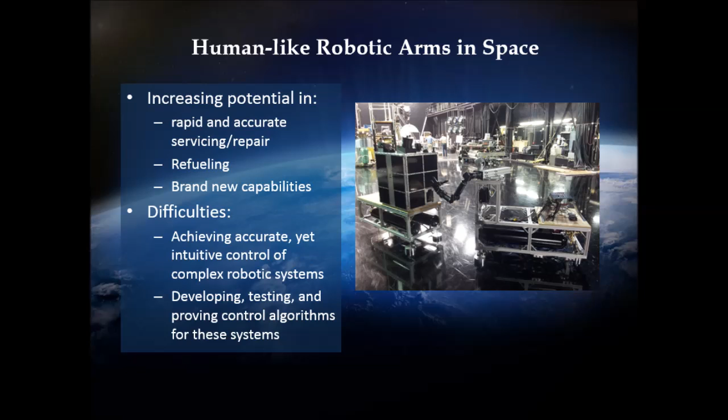Hello, my name is Christina Monakova, and last summer I interned at the Marshall Space Flight Center, and this was my project. I worked in the Flight Robotics Laboratory to develop a testing platform for future robotic satellite servicing demonstrations, addressing the need for an easy-to-use controller for complex robotic arm systems.

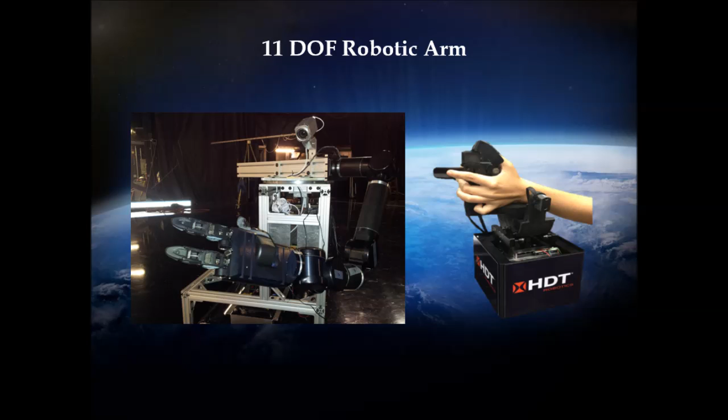I worked on designing an intuitive controller for an 11-degree-of-freedom human-like robotic arm. But to do this, I first needed a way to test out my controller and control algorithms without damaging the lab's expensive arm. Simulink provided the perfect solution.

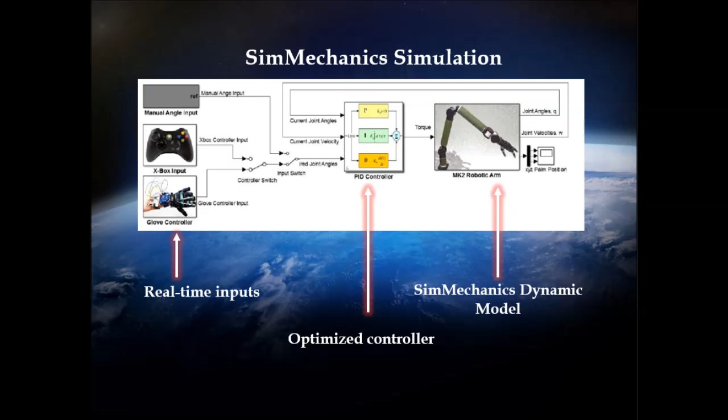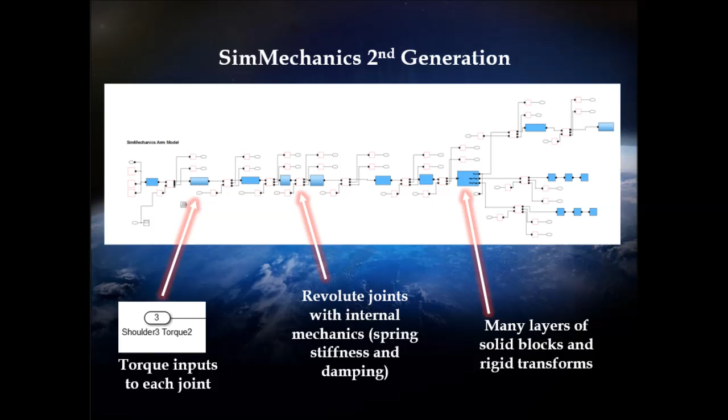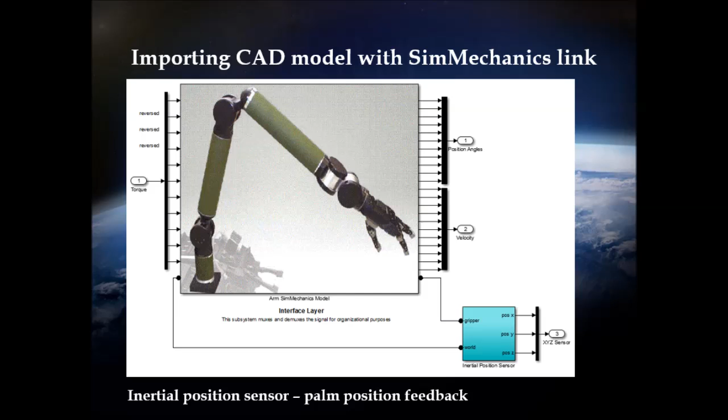I imported a CAD model of the robotic arm I was using into Simulink using SimMechanics Link, added revolute joints, rigid transforms, and constraints until the SimMechanics model matched the lab's physical arm. I was able to directly control the torque input to each arm joint and control this torque signal using a PID controller, which I then optimized.

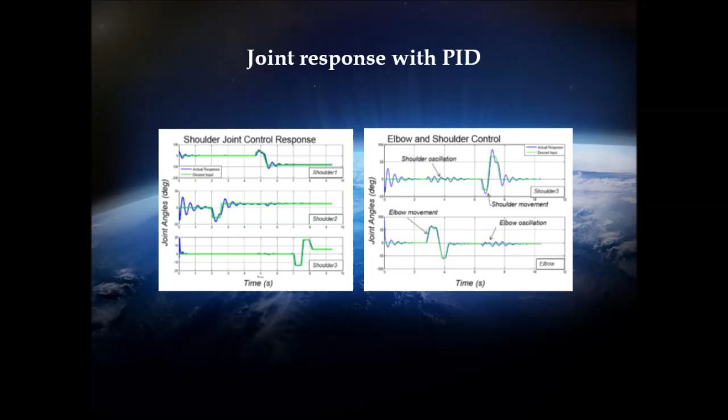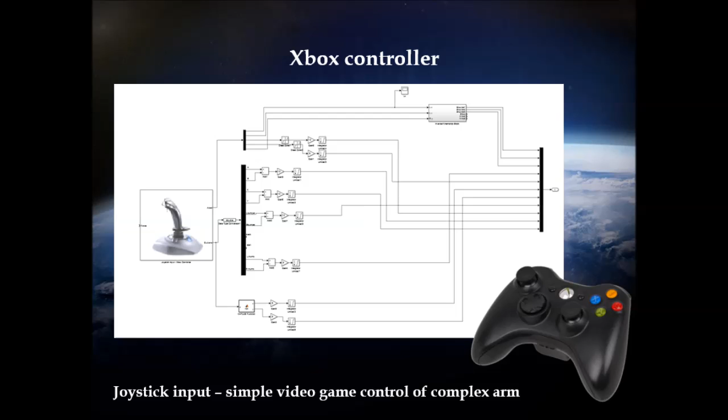Once this was finished, I was able to manually control the arm simulation via angle inputs to demonstrate functionality. Then, to get a little fancier, I added an Xbox input via Simulink's joystick block and controlled the robotic arm in real time like a video game. Once this basic functionality was demonstrated, I jumped into the meat of my project.

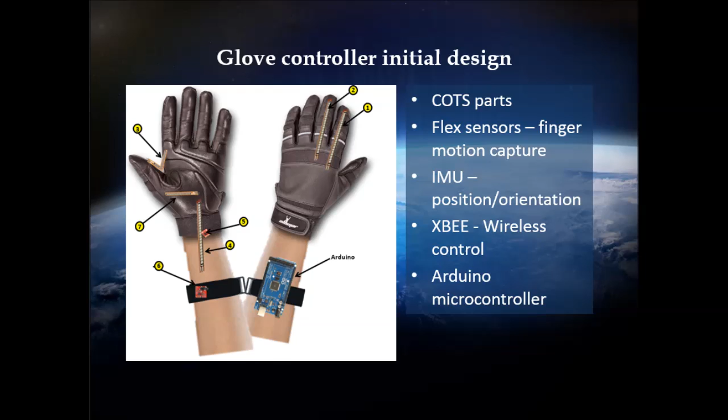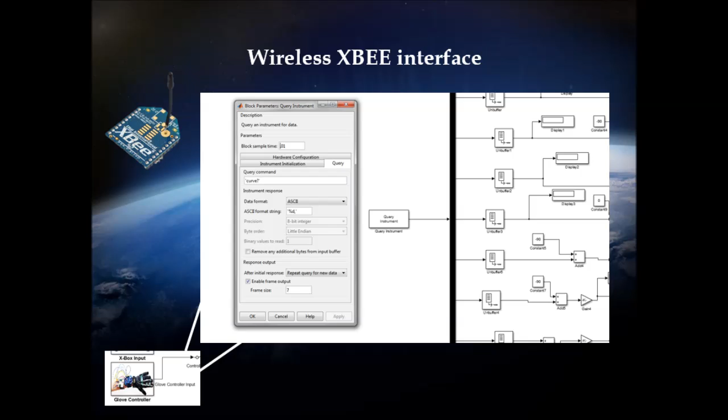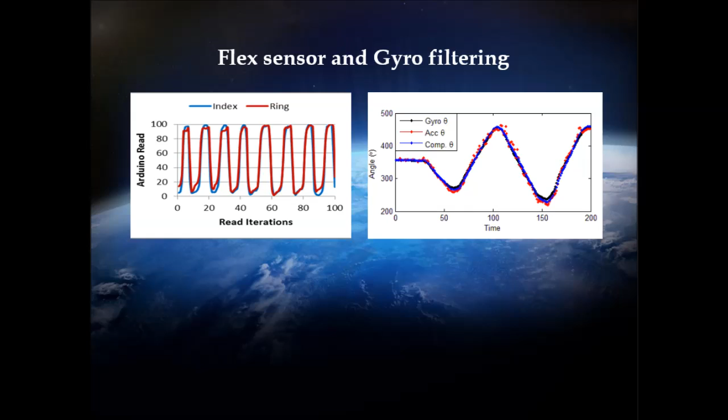I designed a glove controller with cheap commercial off-the-shelf parts, mostly from SparkFun. I used flex sensors for finger motion capture and an IMU to determine position and orientation, as well as an XBee for wireless control. All of this was dumped into Simulink via the Query Instrument block and used to control the arm simulation in real time. After playing around a little bit with sensor filtering and calibration, the glove controller worked.

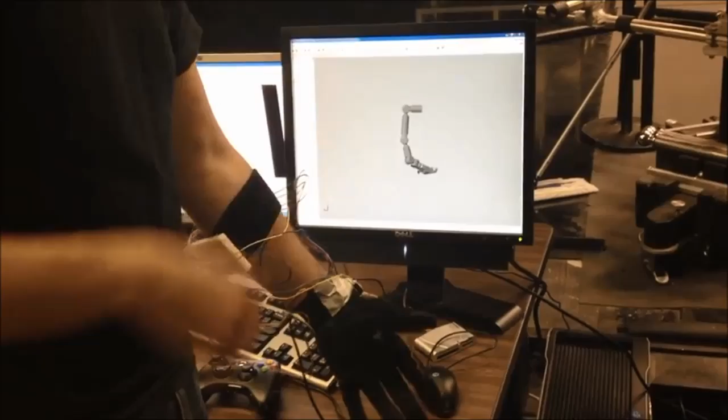Next, an inverse kinematics controller will be incorporated via a Simulink function block to improve the arm control. Also, a Kalman filter will be added to improve state estimation from the noisy sensors, and the arm simulation will be further optimized using Simulink's Design Optimization toolbox.

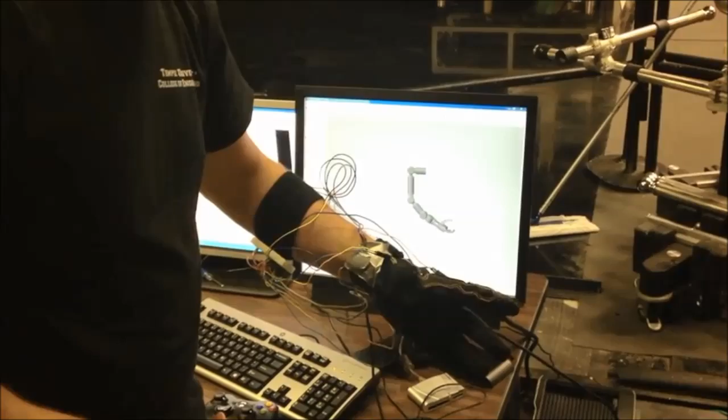Simulink not only lent a hand, but armed this entire project, allowing me to build a dynamic virtual reality testbed for a robotic arm from scratch.